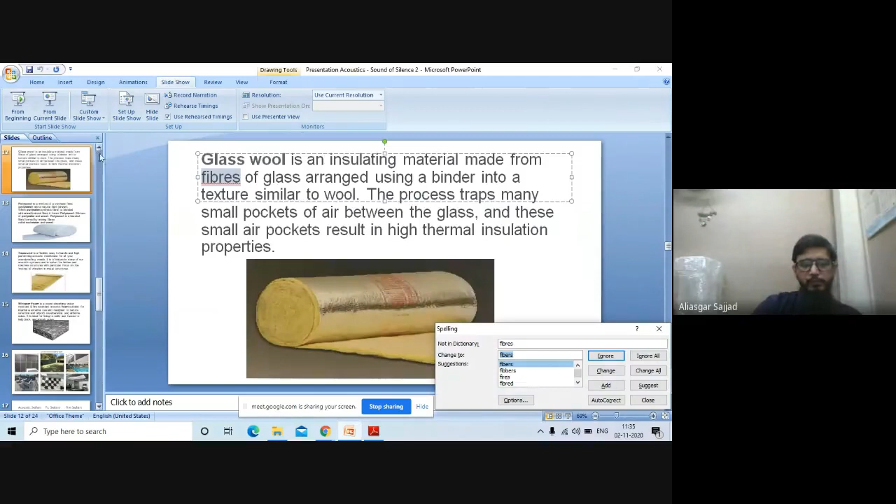So I'll just take over. I can do the screen sharing right now. Sure. You can see my screen? No, as of now. Okay, it's not giving me a share option. Sir, in the lower right corner, there is a present now option. Yeah, I've clicked that, but it's not giving me share option. It's giving me cancel. If you click on that, it will show you your entire screen. You're able to see my screen now? Yes, sir. Somehow my full screen is not coming. Okay, we'll begin like this only. Somehow my PPT is showing me a problem.

So, hi, I would like to introduce myself. I'm Aliasgar, and I started this firm around 10 years back. It was in 2010. We are in 2020 now, and it's been a long journey. Over a period of time, we've catered to many fortes in acoustics, many classifications. As you can see on my screen, it would be hotel rooms, auditoriums, offices, recording studios, classrooms, etc.

So just to introduce you to acoustics, what is acoustics? Anything and everything to do with sound is acoustics. So if you say that this is an acoustical cloth, what does it mean? Either the cloth will absorb the sound, either it will allow the sound to travel, or it will stop the sound from traveling. So any kind of cloth or any kind of material can be termed as acoustic. However, in layman terms today, people say that any absorptive surface is acoustic. So if you can reduce the echo, a layman says that it is an acoustical product. However, if you go by the definition, acoustic is anything that has to do with sound. Having said that, let's go to the next slide.

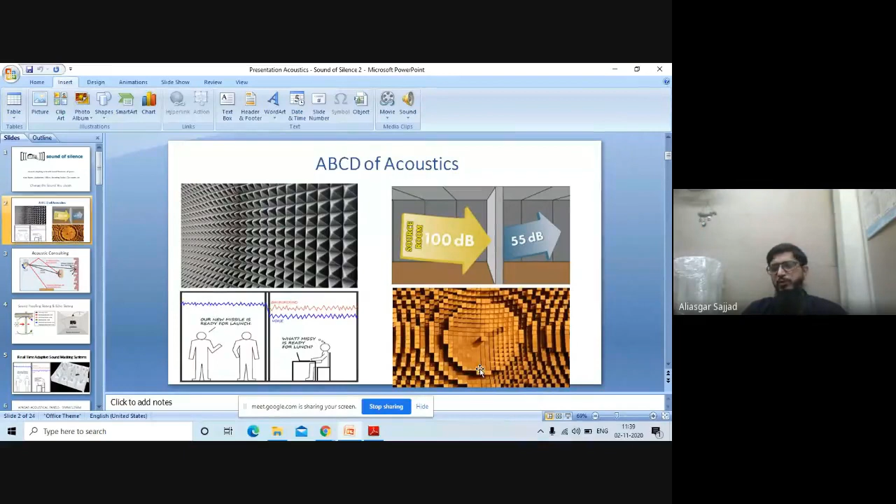Many a times you want the loudness to remain in the room. However, you don't want it to echo. So what is diffusion? Diffusion breaks the sound into very small pieces. So it does not leave an echo in the room, but the intensity of the sound remains the same. So another visual representation of what I just explained.

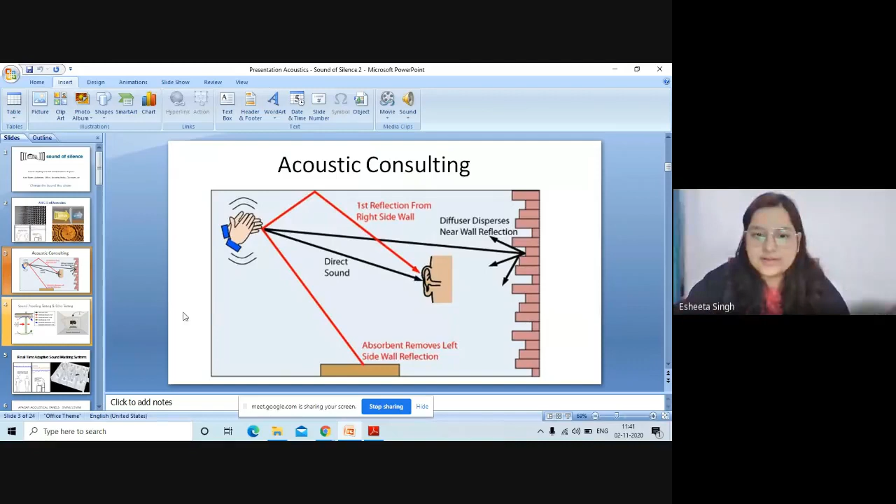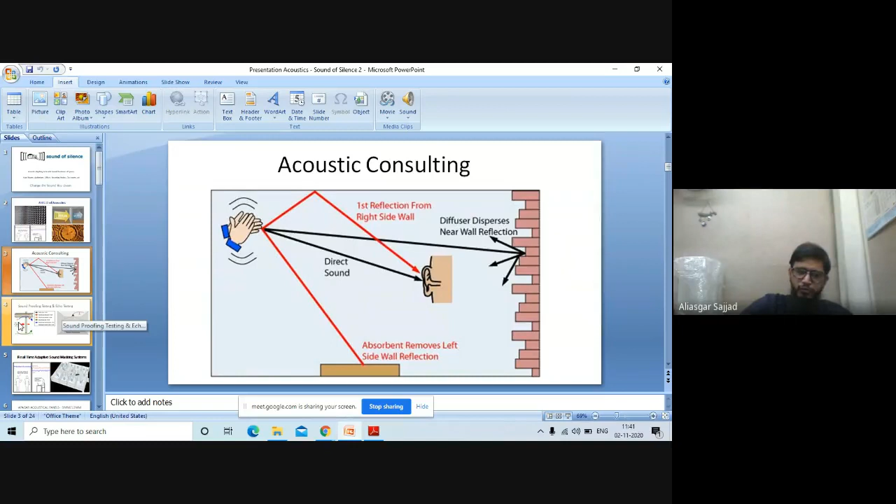Okay. If I am fast or something, Nishi, just let me know. Huh? Yeah. One of my students can answer this. Esheeta? No, it's completely clear. Yeah. Okay. So just stop me if I am going too fast or a little slow, or if you get stuck or something, you can always stop me there, and you can ask me a question. Okay. Sure.

Having said that, now what I talked about blocking is called soundproofing in layman terms. So how do you do sound isolation or blocking, or how do you test? You create a sound on one side of the room, you create a wall, and then you measure the sound on the other side of the room. And the intensity of the sound at the source room and the receiving room are separately measured and subtracted. And that difference is the isolation you receive.

So this is called the sound transmission loss. And that is a loss of sound, and the material capability to give that sound loss is called sound transmission class, STC. So that is the measurement of isolation.

Similarly, if you look at this picture over here, there is a speaker which is throwing the sound in the room where there are multiple reflections. Then suddenly the speaker is stopped, and how much time it takes for it to decay by 60 decibels is measured. And that is the amount of echo in the room. So to find an echo, you have to play a sound at a steady level. You have to suddenly stop the sound, and you have to measure how quickly it falls down by 60 decibels.

You might require a little echoic place, sometimes you might not. Like if you look at the old churches and the mandirs, temples, the old mosques, they wanted the sound to travel to a large area. So they used to have echoic rooms or echoic structures where the sound used to travel and build up. Currently, we have speakers and amplifiers, and we are using technology. So you don't want much of an echo because you are relying on technology much more.

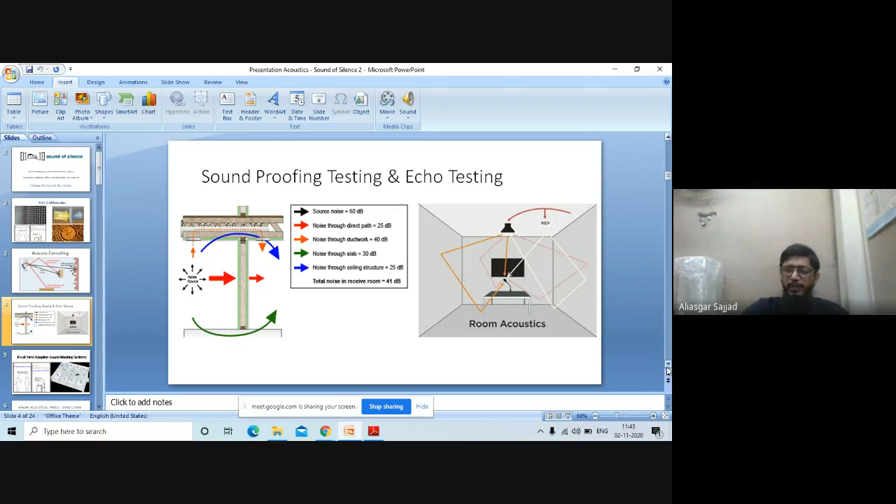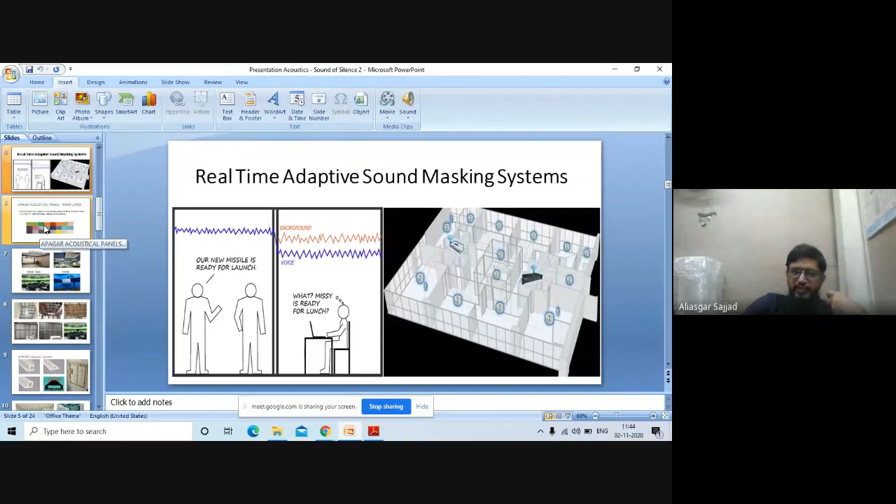Having just given a brief about what acoustics is, I will take you through the products now. So these are 9 mm acoustical panels. These are ready-made pre-colored panels. These are made up of polyester fibers, and they are knitted together. Like the recent pillows we get, there is an engineering which happens in that, and they compress it to a level where it is made in 9 mm, and it is highly absorptive in nature.

Absorptive in nature means there are different categories of absorption. If you see the background of my screen, the back of my wall has these 9 mm panels. So when I stick it directly on my wall, it gives me a 0.35 NRC. Now NRC over here is noise reduction coefficient. And when I take this material 1 inch away from the wall, it doubles its intensity, it will absorb 0.7. So the NRC of a product is measured in less than 1. 1 is the maximum, 100%. And 0.7, 0.35, 0.2 is the percentage that it can absorb. And this is also for certain frequencies.

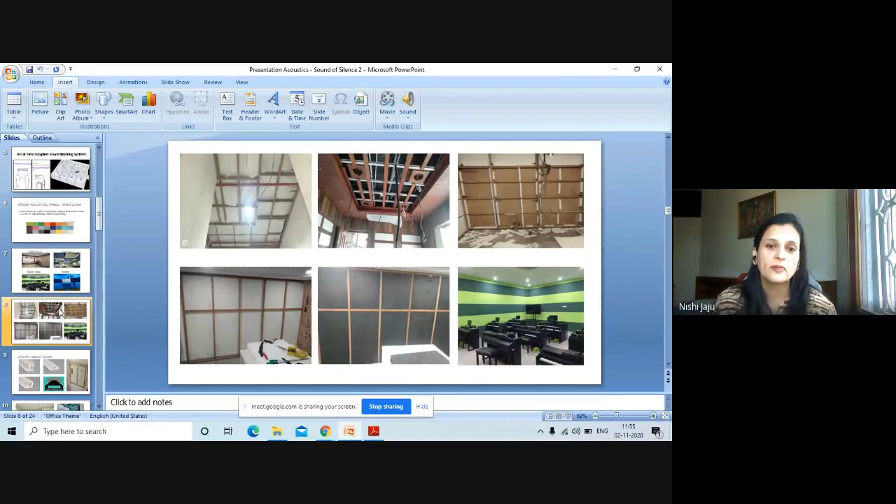We put the material, like if you look at these black ones, this is another material which is called whisper foam. I'll be coming to that. You insert it over there, and then finally you can put your 9 mm panel or whatever finishing materials you want to put. So you have to decide. Every product, even the polyester wool, has its own absorptive properties. So even if you leave it as it is and you cover it up with a cloth or something like that, still there will be a significant reduction in the echo. But then there could be some bulges or something like that. So you have to just work it out.

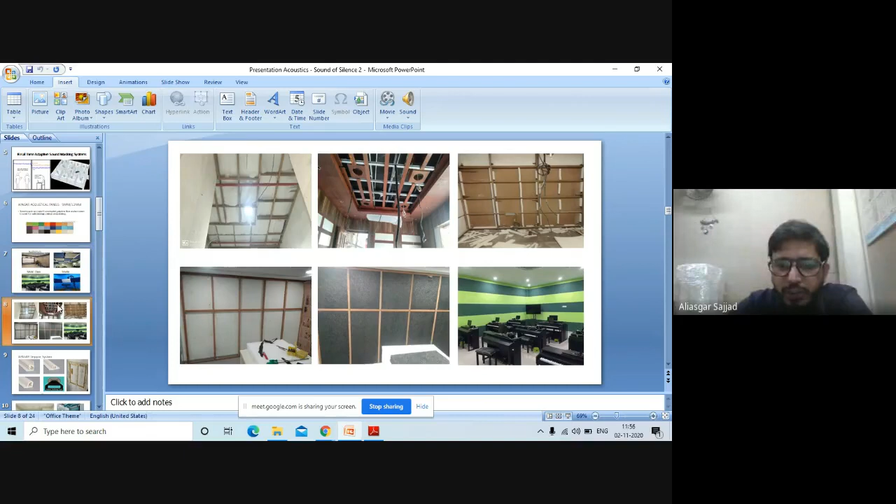If you keep perforated sheets in front, it could do its job and it will absorb the echo. So it all depends on what your finish is, what your interior look is, and then finally you can come to the conclusion what you want to put on the top. I prefer using 9 mm panels when there is no framework required and it's quick and low budget. But when the framework is required, I prefer cloth finishes. Okay.

To cover a cloth on the frame, there is something we call a gripper system. These are the grippers which you see. This is for a corner one, this is for a center one, and these are the edges, the joining ones, means two of them are joining. This is joining at the corner, and this is just on one wall, which needs to be closed at one end. So these are the kind of things which you create. You create a network of grippers. You create a framework, and all you have to do is apply an acoustic material in the center of this and clip the cloth inside.

Usually what happened earlier was that whenever you go to stick a cloth, there is a little bit of untidiness which comes in. And if the fabric becomes loose, you cannot tighten it again. When you are using a gripper system, it usually remains tight. The cloth does not lose its stiffness that easily. And even if it does, all you need is this gadget or a scalpel, and just push the cloth back in, and it is tight again. It becomes very easy.

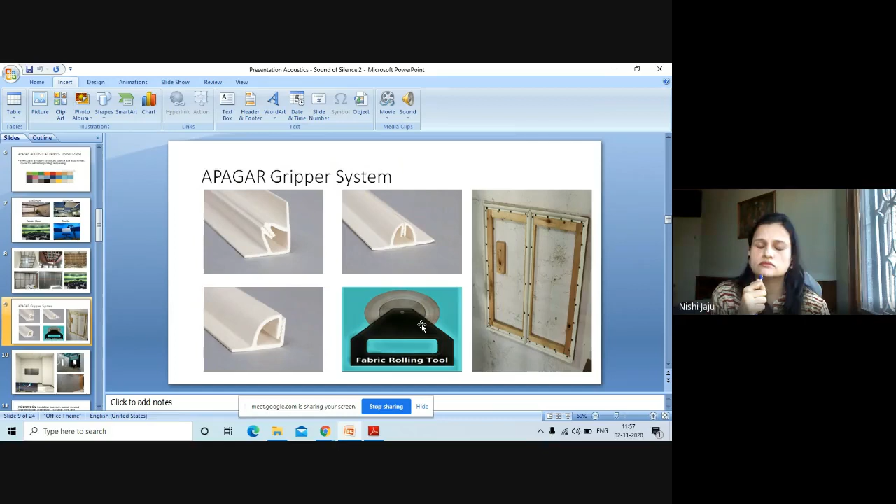But of course, this workability costs a little extra. You have to spend for the cloth. If you want some prints, you have to pay for the print extra. And the framework will cost you an amount, and the gripper will cost you another 120 rupees a square feet with labor. So you're looking at increasing the cost, but of course, the people who prefer cloth finishes will go for this.

Okay. So, sir, can I procure the furnishing from any furnishing shop, or does it have to be the one which you offer? It could be leatherite, it could be any fabric, right? Okay. So, selection of fabric. If you are looking for echo treatment, it cannot be leatherite. You have to see one thing, that air can pass through your fabric. It can be any fabric, but air should pass through it.

So if you blow through the fabric, the air should go outside. Or you take the fabric, you put it in front of sunlight, and you should be able to see the dots of the light. So that signifies that there is transparency.

As I told you earlier, you cannot paint an acoustical panel because its pores get filled. Similarly, when you are using a leatherite or a leather-based material, the pores get blocked. So the sound is actually not reaching the absorptive material, and it is not working. The echo is still there; it is reflecting the sound back into the room. So ideally, you have to use more of cloth which is transparent in nature for absorption.

If absorption is not a need, and you just need to contain the heat or something like that, you are getting an air gap, and then if you're using a leatherite material in front, it could work fine. So if acoustics is not your concern and heat is your concern, yes, you can use a leatherite or a leather-based material.

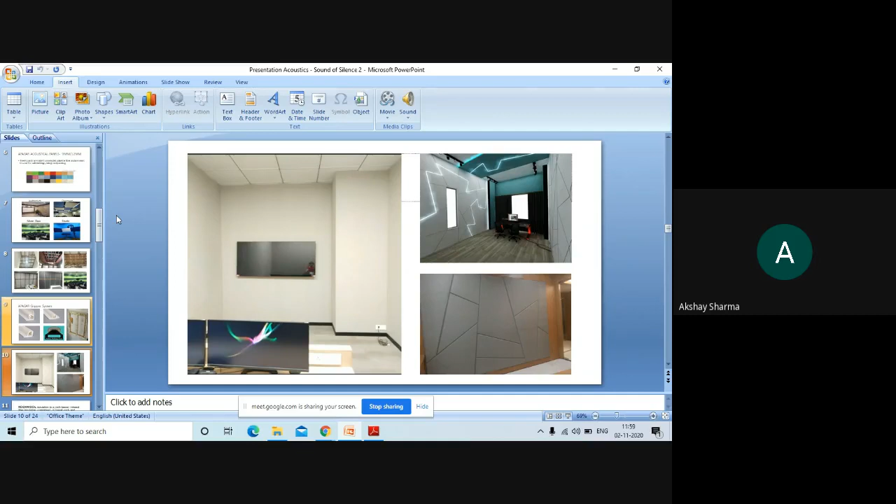Excuse me, sir, I'm sorry for interrupting, but I have a question. Till now we learned how we can soundproof a room by installing panels on the walls and ceilings. Is there anything we can do for the windows and doors also? Yeah, I'll be coming to that. Right now, I've not talked about soundproofing so much. I'm talking about absorption of echo. Absorption does not isolate. I have got something for the door as well down below, so I'll take you through that.

Okay, so other base materials. These are all classic materials which have been used for probably 100 years now. Rock wool is one of them. These are fibers created by breaking stones, rock, and then threaded into rock wool. These are economical, highly heat resistive, and more fire retardant in nature. However, there's a disadvantage. Though people call it a green product, and rock wool is greener than glass wool, it is abrasive in nature.

If you touch it, you feel scratchy, and you'll keep scratching yourself without knowing the reason. So when you're applying glass wool or rock wool, you have to cover it up so that you are not exposed to it. If the cover comes out, you will be breathing it and feeling scratchy. Your client might not know why he's feeling scratchy every time he is there. And with leakage or exposure, he could also get cancer, because when you breathe, the small abrasive particles go into your lungs and can create cancer.

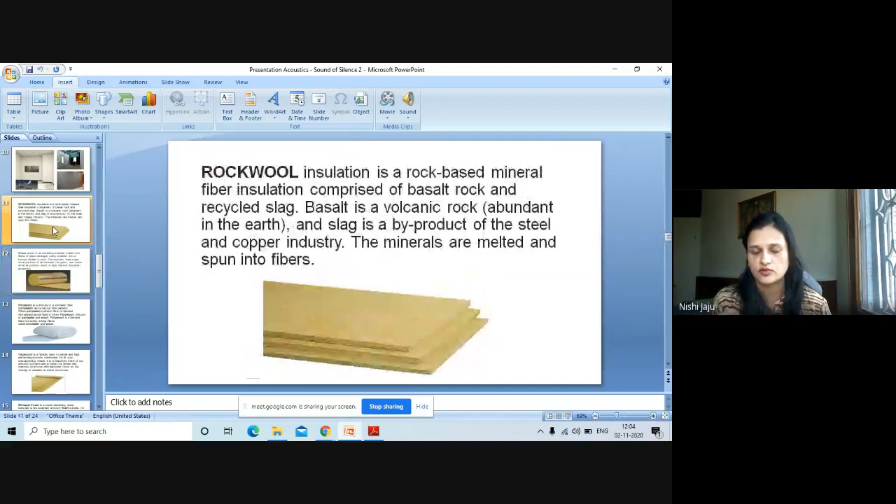So, sir, if they are available in a roll form, can we paste it directly on, say, a wall or the floor of the terrace? So they come in roll form and board form. What you're seeing over here is a board form. In the roll form, actually these are fibers. So even if you stick it, the fibers are going to tend to loosen off. So if you are sticking it, usually you prefer to stick it on the aluminium foil side, or you screw it if you are putting it on the negative side of the exposed surface.

And ideally, you tend to screw it and create another false ceiling below it. You create a false ceiling, you overlay it, and then put a final gypsum or something down below. Gypsum also is an insulative material. Then glass wool or rock wool adds to that, and it gives you a saving of the heat intensity. Right, right.

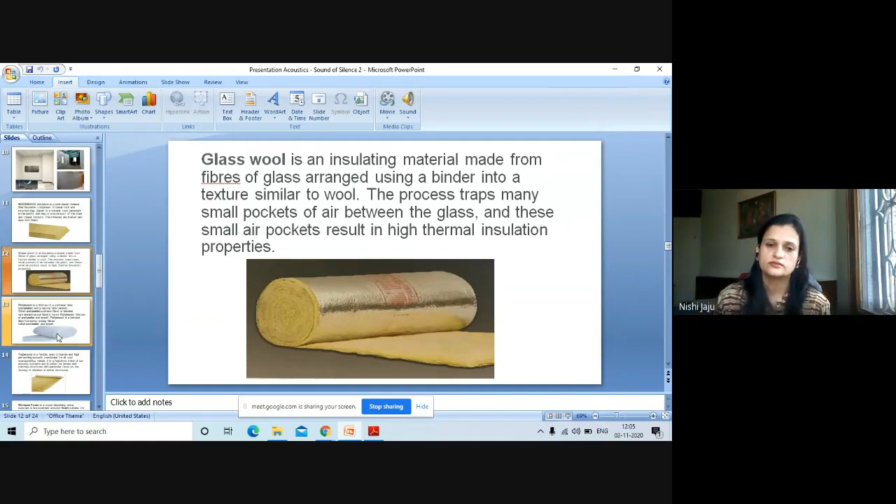So over so many years, we've been using glass wool and rock wool. People started realizing that glass wool and rock wool are cancerous in nature, and we should not be using them. And now, in the past maybe 4 or 5 years or so, they developed a new thing, which is polywool. As I told you, the 9mm and 12mm panels which we saw in the design are made up of this material itself. This is compressed more and created into a board format. So this is a replacement for glass wool and rock wool.

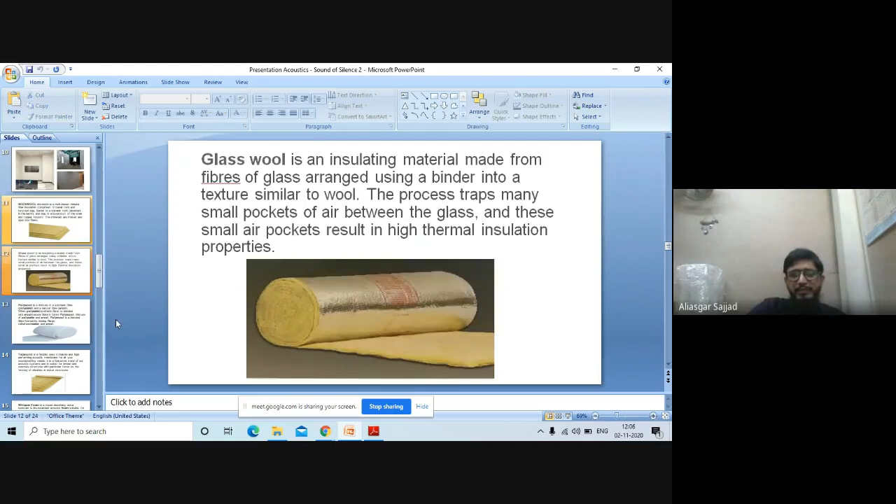It has thermal insulation properties, but not to the level of rock wool and glass wool. But yes, it is a thermal isolator as well as a sound absorber. The benefit is that it is more compressed, it is non-abrasive, and it does not affect the end user even if they are exposed to it after installation. So that is why I prefer using this.

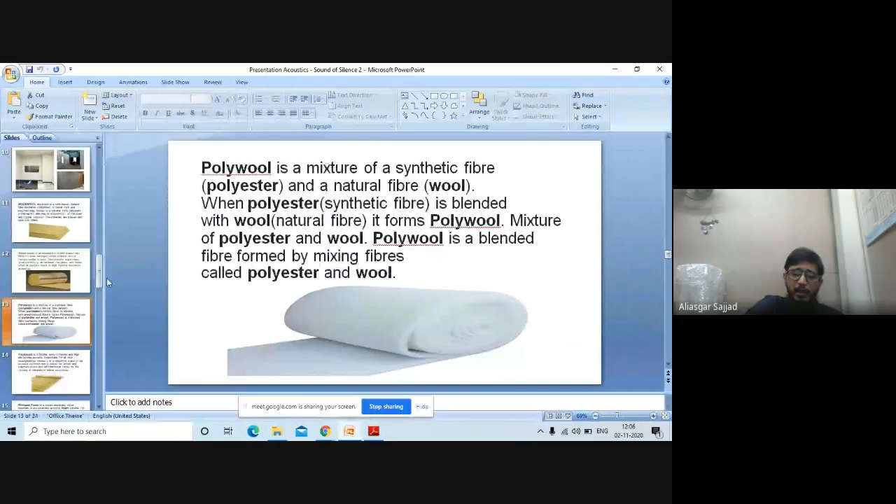It is not fire retardant to that extent either. They say that it does not spread the fire, but if there is a fire, it will melt. So you can't say it is a fire resistant material. These are fire retardant materials. And fire retardant materials are the ones which do not spread the fire, but when exposed to fire, they will burn. Yeah.

So those were all absorptive materials. Now there are membranes, isolating membranes, as we call them. These are the membranes which we use to stop sound from going from one room to another, or vibrations from traveling from one end to another. One of the brands is Tecsound. It is flexible.

That is why whenever you are using these materials, it is highly recommended that you sandwich it between two things. So if you have created a framework, you apply it on the framework and then put another ply, or a Hilux or a gypsum, on top of it. That helps you to isolate.

Now, the isolating property of a Tecsound, a flexible membrane, or a mass loaded vinyl, there are many terms people use: mass-loaded vinyl, isolating membrane, or they might call it Tecsound itself. It will give you an additional 5 to 8 decibels depending on the thickness we are using. So let's say my wall was going to give me 28 decibels or 35 decibels isolation. When I put a Tecsound, I'm ensuring that it is going to give me 40 decibels isolation.

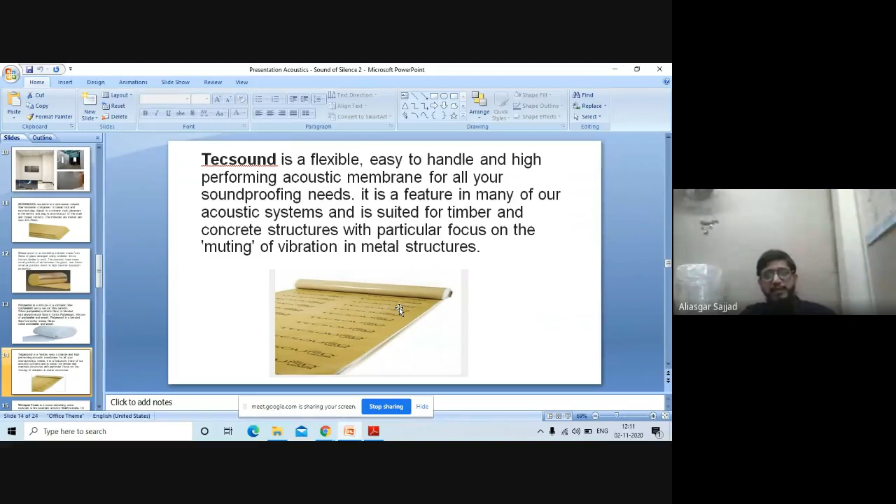This is a very new product. It's called Whisper Foam. This has been invented by the company which had invented the bubble wrap. And this is working on other physics. Usually it is said that when the mass or the weight is high, then the isolation is much better. But this foam works on another principle of sound energy, that it takes it into combs.

It takes it into small combs, and it breaks the sound into so many small pieces. It converts it by friction into heat energy, and it also acts as an absorptive surface as well as an isolating surface. So it's doing both: it is absorbing and isolating. The unique property of this product is it is sound absorbing, water resistant, fire retardant, and has a shelf life of around 10 years. Okay.

So when we are using glass wool or rock wool, after 1 year, its performance starts deteriorating. Now let's say you made a house, a premium place, and you've used glass wool and rock wool. The first year, maybe the tenants or the client might not hear the sound transmission from one room to another. And suddenly, after 1 year, he feels that there is sound, and by the end of the second year, he might be hearing whatever is being spoken on the other side of the wall very clearly in his room.

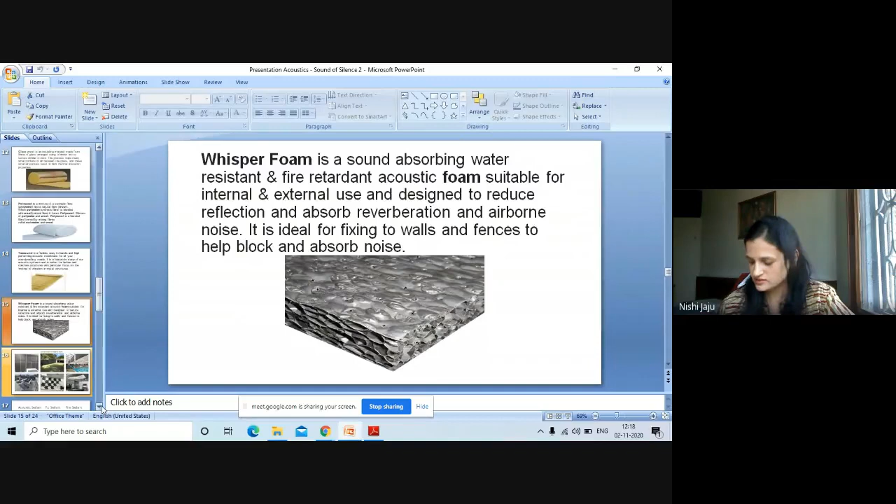Yes, I just wanted to ask what are the main materials that Whisper foam is made up of? It is a polyethylene-based material, and if you see this closely, there are certain pores. These pores have been engineered in such a way that the sound goes inside, gets broken up into smaller pieces, gets absorbed, and is blocked from traveling across it. So it's a different construction, and the base material is polyethylene. It is only polyethylene with its construction capabilities.

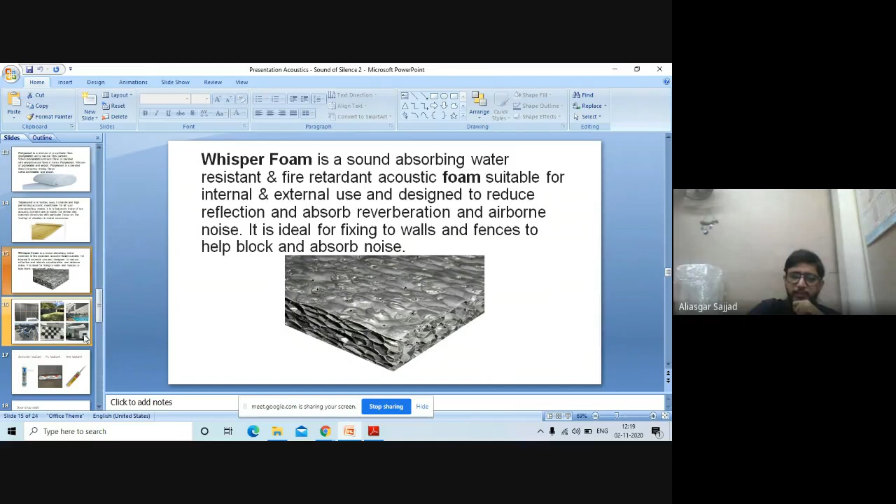Okay. So if you see, there are some small dots over here, and those are the dots where the sound actually penetrates in and it takes care of it. Right.

So these are places where or how whisper foam has been used. We have used it in our walls where there are washroom noises coming from the washroom wall to a conference room. We created a framework, kept the whisper foam 50 mm over here, and then covered it up with cloth.

There is another module which is UV, and since it is UV resistive, it is water retardant, fire retardant. Wherever machine noises are there, residential areas where there are chiller plants on the terrace, and there are residential buildings across as well, which complain of the high chiller noise. Usually what happens is that at 6 or 7 o'clock in the morning the chiller plants start. And when they start, they make a huge noise. So the neighboring buildings and the neighbors get disturbed and they complain a lot.

And these days, BMC is also proactive. So if there is a certain limit of sound going to the neighbor's residence, then they might stop your premises or stop you from using those chiller plants. And it's not economical to change or shift chiller plants once the whole construction is done. So whisper foam acts as an acoustical barrier and a fence for that. This is not used here. It has been significantly used in Australia and New Zealand, so this is one of the New Zealand sites.

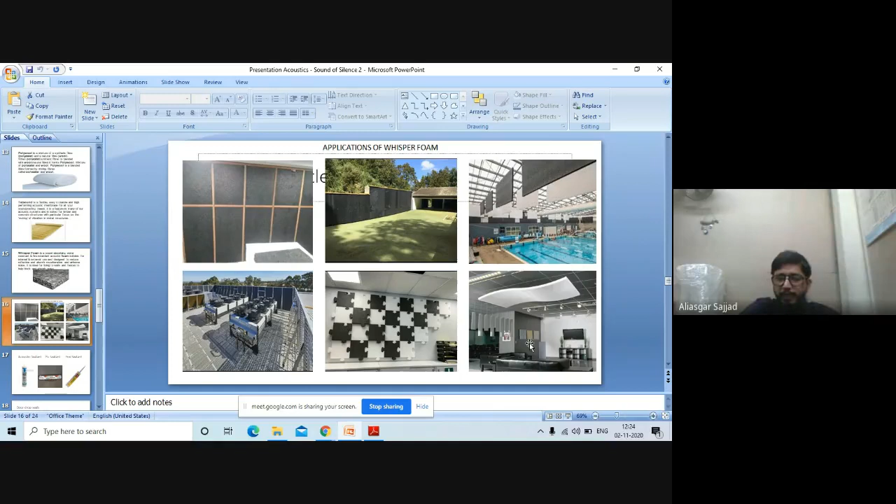If you look over here, these lantern kinds of things and everything, these will also help in diffusing and removing the echo. So the more non-straight lines which are there in your rooms help you avoid the echo and break the sound into smaller pieces. More cushions and non-straight flat walls. Okay.

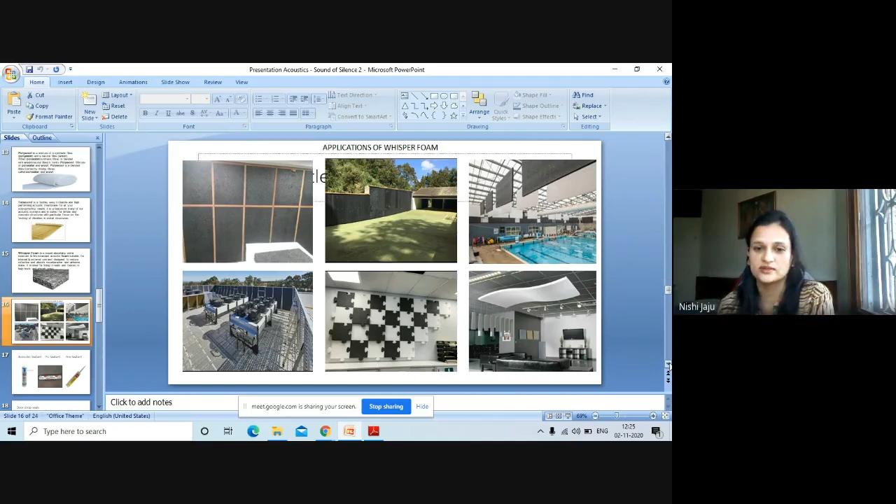So when your conduits are going from one wall to another, and they are hollow, it is ideally suggested that where the wires are coming up, you should seal it up with a fire acoustical sealant. Any hole which is going through and through is going to be a source of sound. Your chain is as strong as the weakest link, and the weakest link is your holes.

So many times, acoustical laborers or contractors in place do not understand the importance of the materials being used. Let's say you've used the sound material in the whole wall, but because 2 square feet of area had less material, he did not put it over there. Because of that, there could be a transmission of sound. Once you've seen the final finish, you will never come to know.

You'll say, I sent the material properly to site, they have used it, why is the sound going? But there is that 2 square feet of area where he did not put that material, which becomes your weak link. So all those things need to be sealed and educated to your contractors or your team. Even if the material is a little less, stop the work and tell me, I'll give you new material, but don't compromise on materials for the sake of finishing the work.

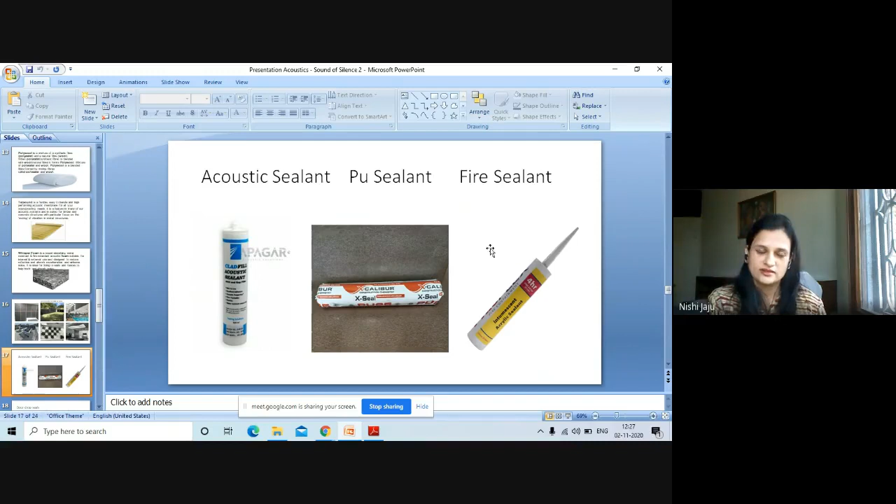So somebody had raised a question about doors. There's very limited things you can do for floor spring doors, and for sliding doors. The thing about a sliding door or window is that it needs a gap to move on wheels. And when you require those gaps, there's going to be transmission of sound.

Those gaps are filled with a small woolen pile, as they call it. Eventually that pile, with rigorous movement or exposure to water, tends to deteriorate and lose its properties. Then over time, sound travels through sliding doors and windows. So wherever sound is very critical, we do not recommend sliding doors and sliding windows.

Where it is okay, sort of, that we want to isolate to a certain extent, but a little bit of sound coming in would be okay. Then sliding doors with a laminated glass or a DGU, what we call a double glazed unit, people are putting. Sometimes it works, but it is highly not recommended if you are looking from an acoustician's point of view. I do not recommend sliding doors and windows.

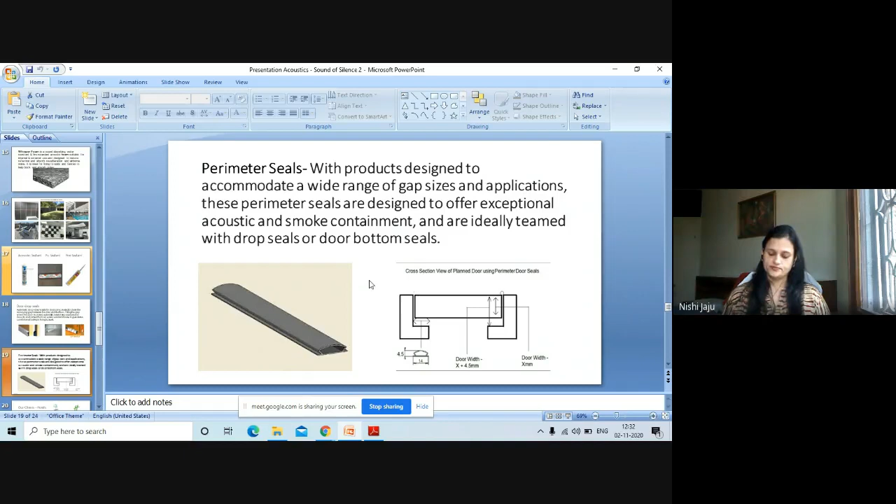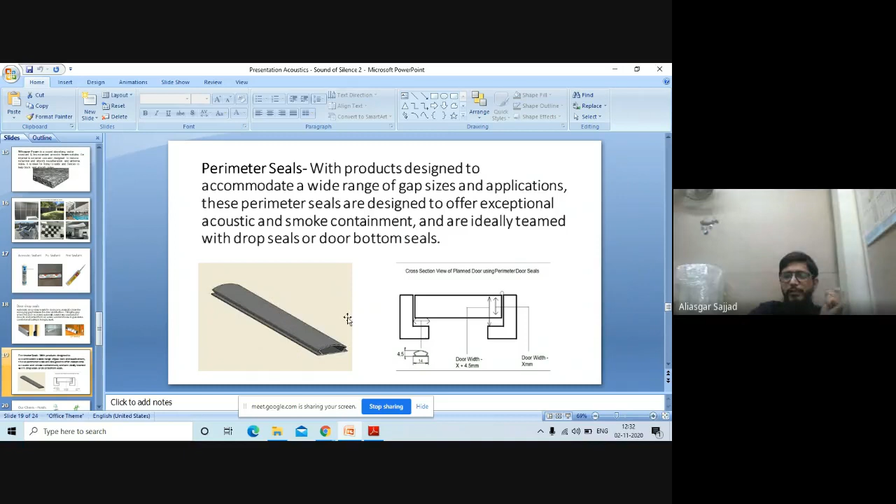So when I place it over here, when the door closes, there are two advantages. The rubber fixes itself to it and doesn't allow air from these gaps to pass through the room, and it blocks the sound. The second thing is that if there is banging, this takes most of the banging noise and the impact. So it stops the impact noise as well as the airflow through the perimeters. So this, along with a drop-down seal as a combination, works for isolating a door really well. If either one of them is not there, then probably the effectiveness wouldn't be to that extent.

Now I'll just take you through what is so critical about certain industries. In hotels, what is important is that there is something we call a late check-in and late check-out. And people go to hotels for relaxation, for playing or something like that. So if somebody is playing a loud television in their room, it should not be heard in the lobby. When somebody having a late check-in or check-out is walking and talking in the corridor, it should not disturb a person who's sleeping inside the room. So both of them are critical.

And that is why the acoustical door is very important over here. The gasketing of their doors is very important. They require a fire door, but with that, they have to have these seals, a drop-down seal and gasketing, which is really important.

After this as well, if you go to good hotels, you will find soft music being played in the lobby area. That is also being played in order to curtail that additional sound, what we call a sound masking system, which I was talking about. So that music also acts as a sound masking system.

So what happens is that even if there is a little transmission of sound from within the room to outside, that is being covered by the soft music which is playing continuously and does not disturb somebody else. Right. So these are the two things which are very critical in hotels.

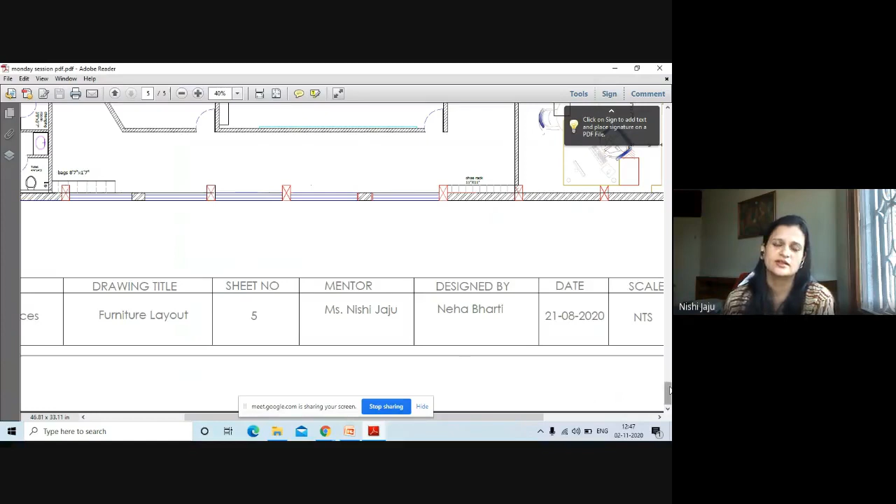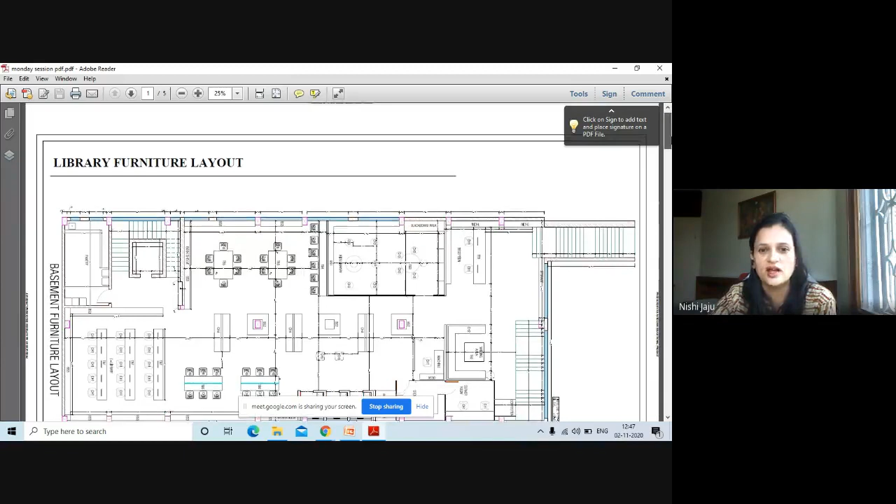Right. Anything else, Nishi, you would like? It has been very informative so far, but just a little briefing on my batch of other senior students who have been doing their project on recreational spaces, out of which one is a library, which is right here on the screen. You can just break them as, number one, when is the right time to get a consultant in? Secondly, what kind of acoustics would be required for a space like a library?

Okay. The right time to get an acoustician in would be in the initial stage of planning, because when you're designing something, he can tell you how much echo there is going to be, how much wood to use, how much fabric to use, or what type of material to use, and then you can design, because you don't want to get into the designing part and then come to know that in this design this will not work. So ideally, it is advisable that you have an acoustician in the earlier stage. Maybe, as per the drawings, he can tell you how much wood or acoustical material you want to use, or he can work along with you on what kind of design you can put in that space, and then you can fine tune that with your creativity.

Okay, great. In certain places like a library, you don't require much of an acoustician as such. If your basics are right, probably you don't require a person like me at all. So the prerequisite of a library is that the space needs to be silent, and it should not echo, because if somebody is whispering, it should not disturb anybody else. So there could be 2-3 things you can play around with. One thing for sure, you have to have it isolated. So from the drawing which we are seeing, what I can see over here are glass windows.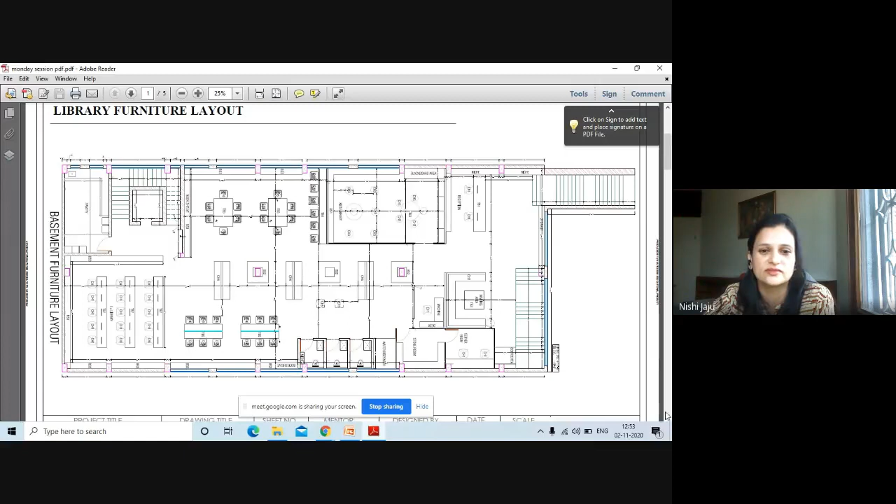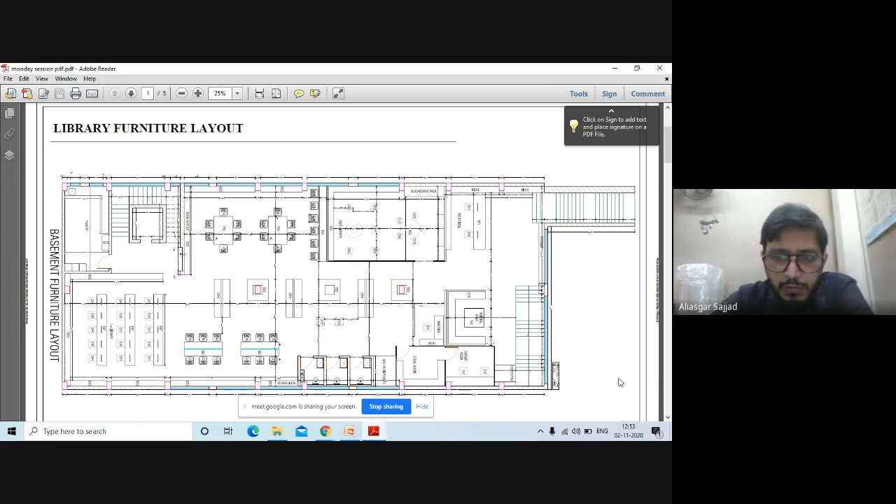So Ishika, you can make a note of this point. And the next is... So I would just like to ask a question. How do we reduce the sound of floors? Like if we are walking on the second floor and the sound is reaching the first floor. The impact noise, what you're talking about. Yeah, I'll come to that. So, are we clear on this point? Is the library furniture layout okay? Yes.

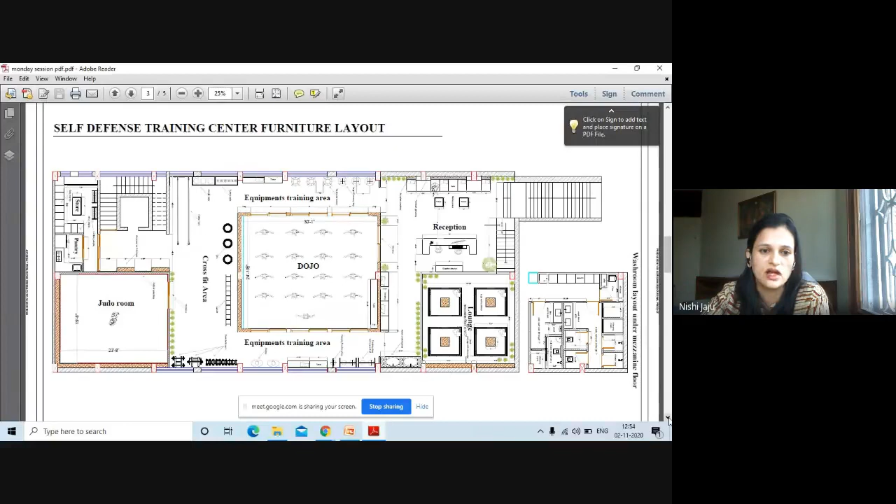So the next in line after the library. This is the same thing; she has created a mezzanine floor on top of it, a small area. And the next is a self-defense training center. Although some part of it is open, the dojo area, which is in the center, has sliding doors and a wooden structure completely. And the rest of the fitness part is all open, and the judo room is also open.

Okay. So now let's assume that I am a person who wants to join the training center, and I'm sitting at the reception. If it is too quiet, I will not like it. I will not get that kind of energy. So I want the sound to travel in this place. I don't want it to be echoic, but I want the sound to travel so that people feel that liveliness and energy. Motivated. So over here, I would use more diffusers rather than anything else.

The same thing goes in the judo room and the dojo room. That is where you want people to feel that liveliness, that strength or energy coming out from that person. So you want that liveliness. A little bit of echo in a judo room or a dojo room might also be good.

But ideally at a reception area or more on this floor space, if I have to do more of walls or something like this, I would prefer using more of diffusers. Okay. So I would want to break the sound into smaller pieces, however, the energy levels remaining the same. Right. Yeah. There is another thing.

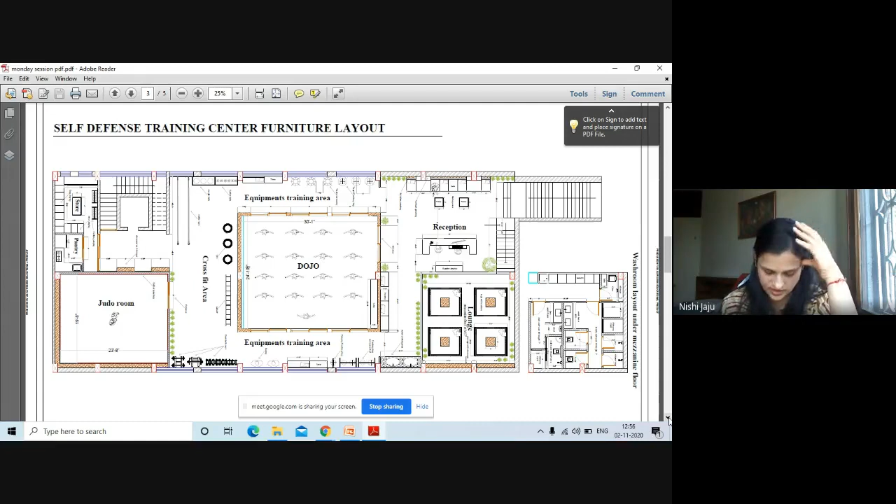The reason being is that you have those rubber carpets or mats which come usually, because there's going to be impact noise, and the impact noise is always going to travel through the beams across. Right. So marginal treatment would help. Putting the material like Tecsound, putting vibrational pads, and then creating a flooring for this area where the weights are going to fall down is advisable.

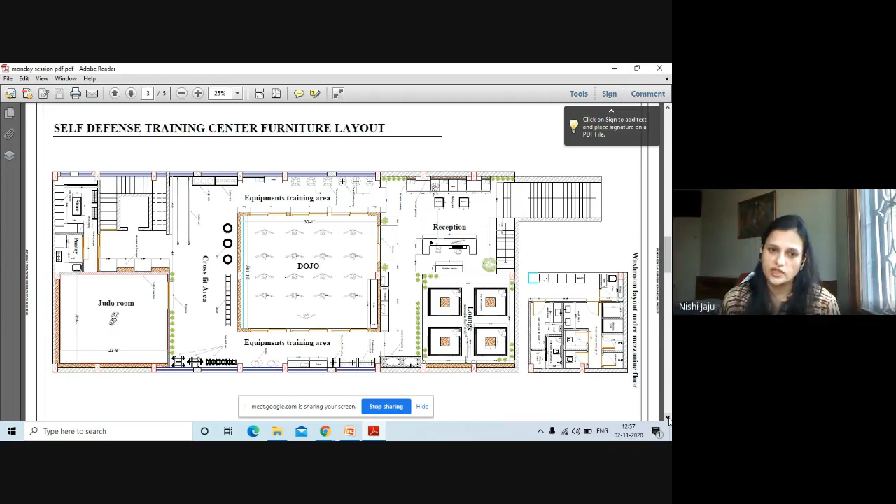So you will have to create an area, and again on top of that ply or something, you will have to put a little bit of concrete as well, because when the weight falls, it will break immediately. So you don't want it to break, so you'll have to do a concreting. So you'll have to reduce the height a little, or you are raising the flooring by somewhere close to around 10 to 12 inches. Right. Okay. So you have to be prepared for that.

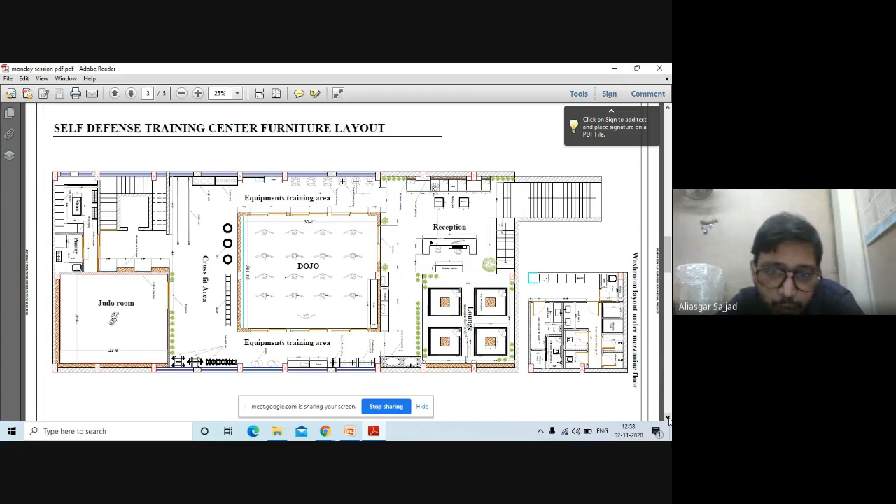As far as the judo room and the dojo room are concerned, they'll be having mats where people fall, they don't get hurt. So as it is, that is not a problem. So apart from that equipment area, I would suggest only using diffusers or very limited use of absorbers, so that there is sufficient amount of echo inside the room and the energy is not completely lost. True. Right, sir.

Vaishali, you can make a note of everything sir has said. Yes, ma'am. Okay. So we move on to the next.

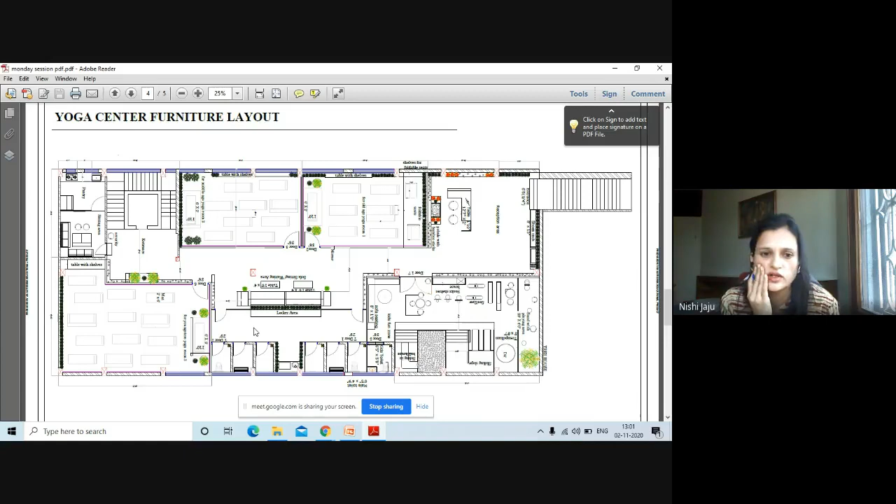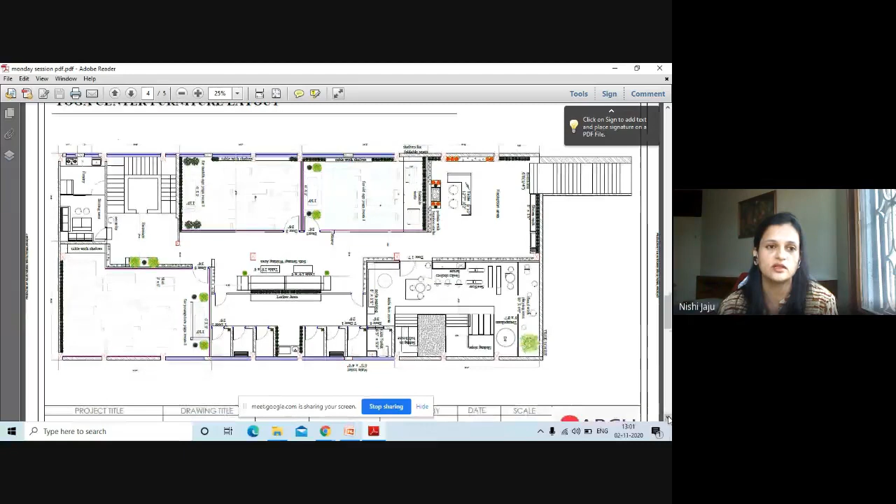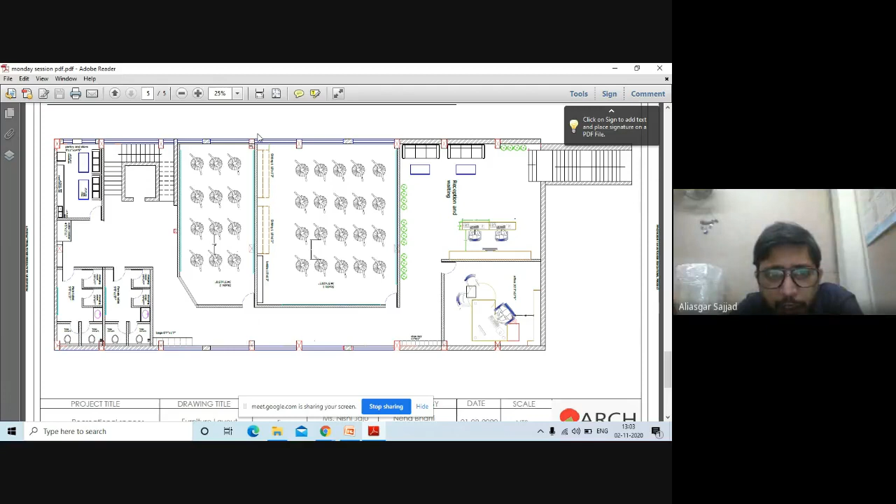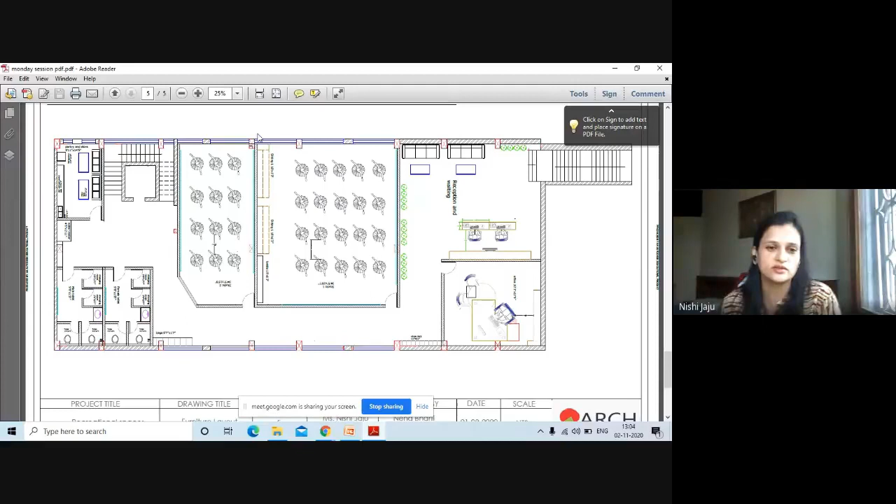Ideally, you should restrict critical walls from electrical conduits and plumbing pipes. Of course, the door needs a little bit of gasketing over here. Okay. Fine. So most of our concerns are solved. I was looking forward to the dance studio and the yoga studio, which I was really concerned about, and you have solved our query. So, thank you so much, sir.

Most welcome. And my students, if they want to ask you something. Yeah, just a moment. Yeah, so if anybody has anything.

Yes, so I was asking about how to reduce the impact noise. Okay, the impact noise, as I said, if you want to reduce it from the floor, you need to raise the floor, create an artificial floor. So create a framework, maybe of wood. It depends on what kind of impact is going to come. If it is just walking, you create an artificial floor with a 2x2 grid of wood.

You put some membranes. There are neoprene membranes which come. Just a moment. You place that framework on the neoprene membranes at certain positions, at a distance of every 4 feet on the framework. And then in the gaps in between, you can fill it up with polyester wool and just overlay it.

You have to ensure whenever you're doing such a kind of a construction, the edges are not touching the wall directly. You have to leave around 8 mm or 10 mm space around the periphery, so your ply does not touch the wall. And that 8 or 10 mm space which is left, you have to fill it up with sealants, so that the vibration, direct impact vibration, is not traveling through the wall as well.